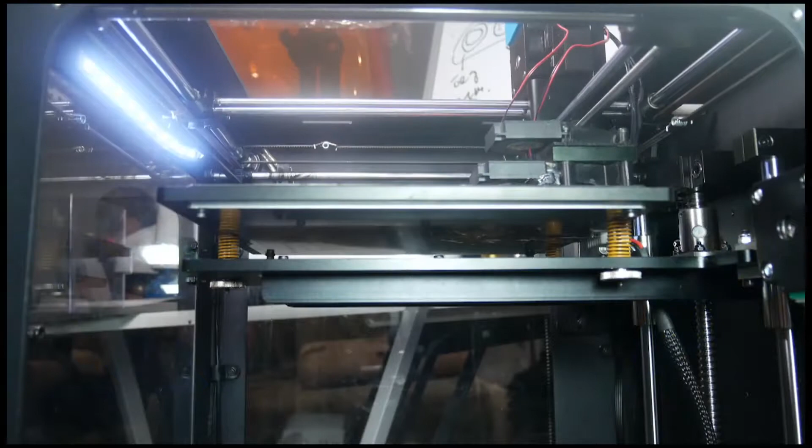So, I think we can go into a variety of different areas. Of course, we've got additive manufacturing, sometimes also commonly called 3D printing. We've got IoT, so Internet of Things for manufacturing is really called IoT for MFG. We've got all sorts of connectivity capabilities and so forth, and latest and greatest technology, for example, in machine tools that may actually be on the machining side, but now we're seeing machine tools that have additive or 3D printing type capabilities on them, so we'll call those hybrids.

But I think really what we're seeing is we're just seeing a lot of advanced technology working its way out into the manufacturing sector. So what's happening is all of these great ideas are all coming together, and now they're being applied in manufacturing.

Simultaneously, and really what's going on is this is happening at an accelerated rate. So you're seeing new technology, and it's getting out there. Instead of taking 10 years or 5 years or even just a few years, people are accelerating those technologies out there into production because, of course, it gives you an advantage over your competition. So you want to get it out there as soon as possible. Yeah, we totally agree. We've seen it on our side.

These two communities of technology, big tech and our manufacturing community, manufacturing technology and distribution, are starting to bridge, but not fast enough. That's one of the things we're doing, trying to get out into the valley and talk MT360, talk about meetups and the different things that each community didn't know about one another.

We're seeing a lot of startup companies really start to accelerate our industry. People would say disrupt the industry, but I think they're accelerating it. AI, machine learning, certainly on many aspects. I'm starting to see a little bit of that in the controls world.

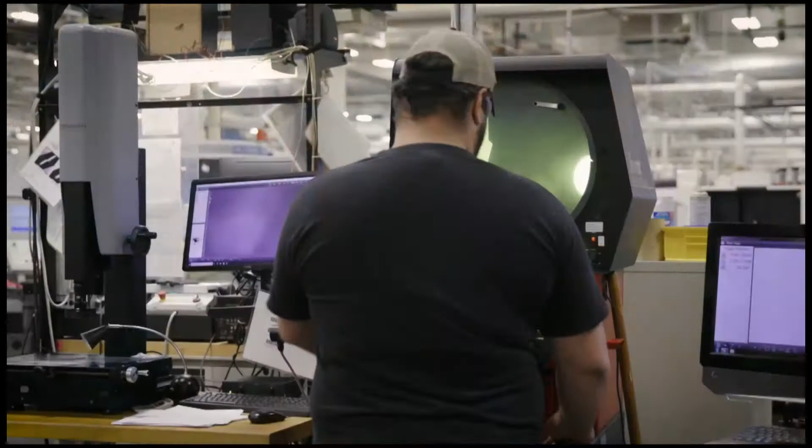But the reality is the control is really where it's at, because if you think about IoT, Internet of Things, the controller is linking into it. This is where all your sensors are coming together. I was a graduate student about 35 years ago, and I would spend months putting sensors on a machine tool, make several runs, collect all the data, and then analyze it. Well today, every time we make a pass on a machine tool, all those sensors are there. We're generating all the data that 35 years ago was a big PhD project - it's now in production. So to me, that next generation controller is gathering the data.

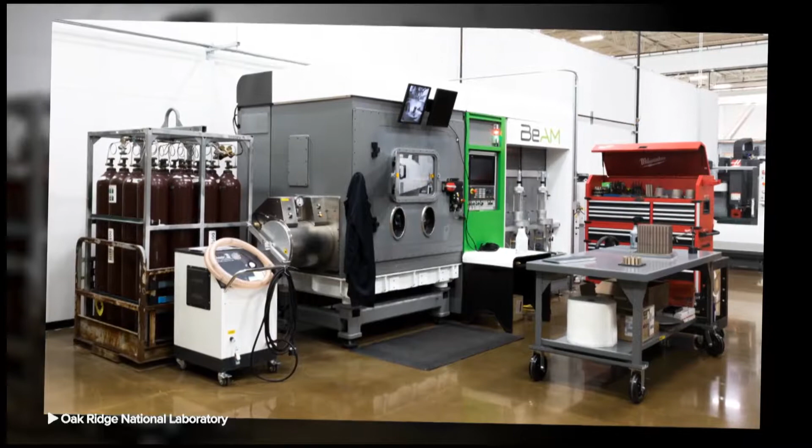That's part of it, and then connecting it to the outside world where we can take a look at models. Is our machine behaving properly? Predictive maintenance - I was just reading some articles today about predictive maintenance. So is the machine doing okay? And if it's not, should we shut it down, or can we have a controlled shutdown maybe over the weekend when we do some repairs, as opposed to just having the machine break, or even scheduled maintenance where maybe you really don't need it, so it's not very cost effective.

So I think it's connecting the information from production, and as an individual part is moving along, I've got information from this part, and when it goes to the next process, that information moves along with it. So when it finally shows up - let's say I'm making a turbine blade, and that blade is going to, say, Delta Airlines or Tech Ops down in Atlanta - when that blade shows up, you know exactly how it was made. And if we're talking about printing that blade, and we're not quite there yet, we're going to know the microstructure, every element of every grain of that blade. So we know that's good. We're going to know where it came from, and that it's a genuine blade that belongs in that engine, so it's placed in a very secure fashion.

So up to now, a lot of this production data has resided on the controller, on the machine. In some cases, you might have a linkage up to a PLC or SCADA system. How do we get that controller, the horsepower and intelligence that a controller to date has provided - do we have to have that on the machine? And if not, how do we get that to the edge, and what might be the benefits?

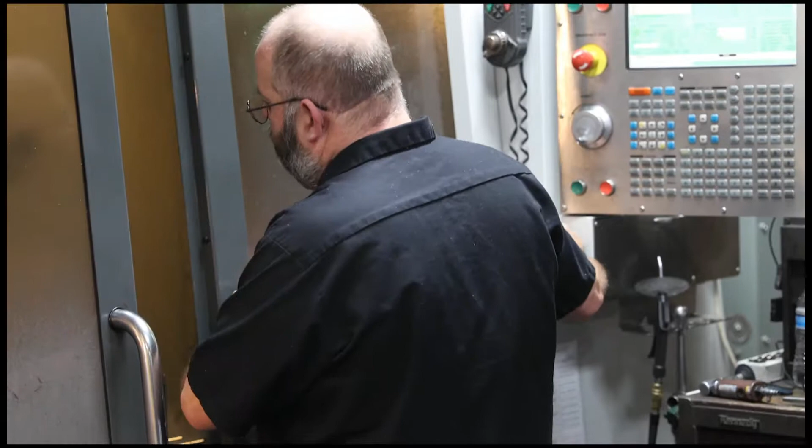Well, I think it's sort of interesting - you used the key word there, edge. People are familiar with cloud systems, this nebulous cloud out there, and the reality is people are using things like Dropbox or Google Drive that they're very familiar with - that's sort of out in the cloud. Edge would be right at the machine. And then we have what I'd call the fog, which is where the cloud touches the ground. Really, the machine tools or any systems coming out today have such powerful controllers on them that you can say, well, we can do the processing locally. You also mentioned artificial intelligence - so we've got AI going on, and I look at AI as almost a commodity.

I can go out and we've got even high school kids now programming for AI, right? So now here's the real question.

The controllers probably have the horsepower to pull this off, right? But if not, well, they can go to the cloud and use processing over in the cloud. So they'll go from edge through fog into cloud, even in terms of data storage. They may send the data up through the fog into the cloud. And really what's going to happen, think about it. And by the way, it happens with computers as well. The computer I bought a few years ago, maybe it's not powerful enough and fast enough, so I get another one. Well, that's one thing when I buy a $500 or $1,000 PC.

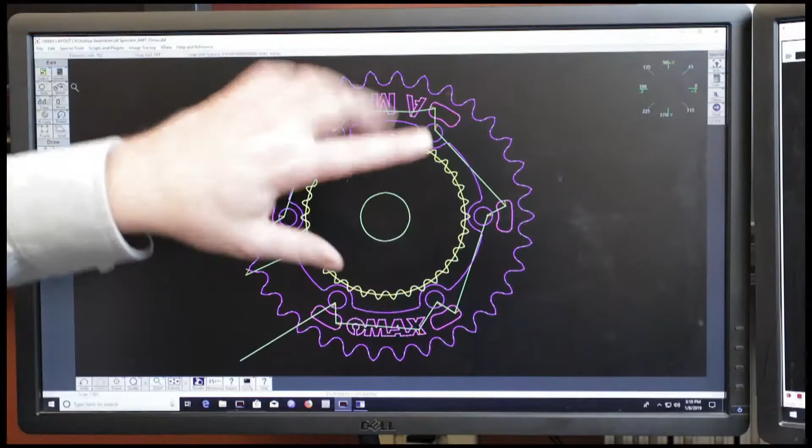But when I've got a $500,000 machine tool, you don't just say, well, I'll get rid of that one and get a new one. What happens now is these controllers are going to be smart enough so that as new algorithms, new capabilities come along, they'll be able to say, oh, I don't have enough power here, I'm just going to go off into the cloud.

It's almost a little retro, but when I was a student, we had terminals. We would go off to mainframe computers, and the terminals were computers, but they weren't particularly smart. Then we went to PCs and did all local processing. And now what we're seeing, whether it's on a machine tool or even your PC, is it's going off to the cloud and making use of data externally, processing here, processing there, out in the cloud.

You really can't tell the difference, right? And that's really what's going to happen with our manufacturing operations and our controllers. They're great locally, but when they need to reach out, they're going to reach out and make use of the rest of the cloud and all the infrastructure that's out there supporting it.

Yeah, understood. And sometimes we get challenged when we lay out that architecture, and people will say, what about collisions? What about, fill in the blank, that has very high impacts to latency. We can't have millisecond delays. We can't have so on and so forth. One of the reasons I've heard is that it takes so long to read G code, which brings that back up onto the discussion point.

Things like trajectory planning, and there are some other ways by which we won't be so constrained to G code. Tell us two things: one, what does it mean to get away from G code, and two, what are the things you see today in technology that let us get away from G code right now? So I think number one is, G code is just a way to go from your design down to controlling the motor, the servos on your machine tool.

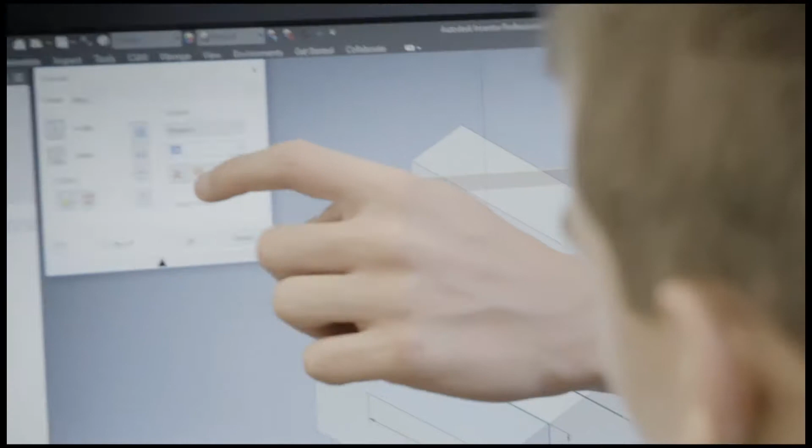Now, that being said, I want to make it really clear: we are not going to drive the machine tool from the cloud in the end. You're going to have your local controller, it's going to drive your machine tool, but you'll have perhaps some trajectory planners at a much higher level, taking a look at, okay, we're going to generate some of the trajectories, or maybe when we have new tool offsets or tool wear, we'll analyze those, execute those, and download those to the machine, let's say in between two parts. So just like you do today, you make a part, maybe you make some measurements, right?

You punch those offsets in the machine, and as opposed to the machine locally crunching and generating a new set of trajectories, it might be generated in the cloud, then sent over to the machine to execute. So you're going to break things up, and depending on what kind of power you need, you'll have more computations happening down at the local level, and up at the higher level, in the cloud and so forth.

We've talked about trajectory planning, which covers our CAM side of the world, with generative design helping us advance our state of design on the CAD aspect, and then looking at in situ inspection and the technologies that make sure what we planned, we actually made, and it was correct. That whole linking of those parts together is the digital thread, and connecting the data with things like MTConnect certainly is an enabler.

Out of CAD, out of CAM, out of the whole computer-aided engineering world, are there certain things that have advanced better than others? And is there a particular lever that we want to pull more than any of those if we wanted digital manufacturing to come to realization faster?

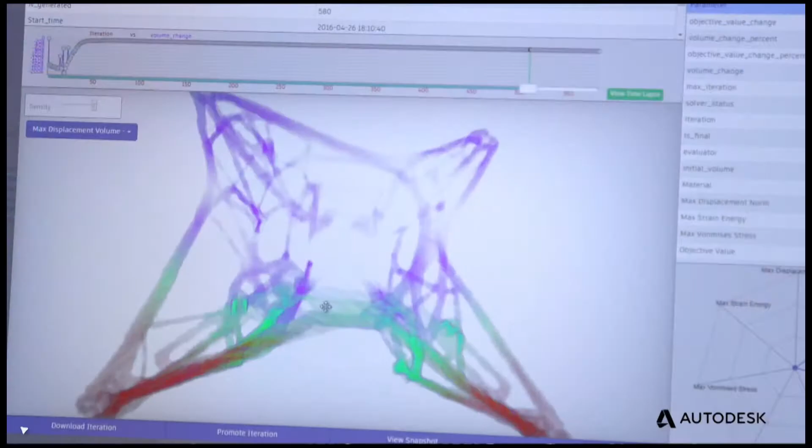Let me talk about generative design. For those of you not spun up on it, you basically say, here is what my loading is on my part, giving a functional description of what I need my part to do. Then the computer modifies the geometry of the part, eliminating elements that aren't supporting any load. And so you get these cool looking, almost natural type of designs. A lot of us have seen these types of things, but there we're only looking at geometry, so that's generative design with geometry.

But when you're looking at additive or hybrid systems, you can start to take a look at generative design with varying material characteristics. Let's take a turbine blade. At the root, there's a lot of stress because it's being pulled while it's spinning up, so you want a tougher material down there, as opposed to a hard material. But you might like a harder material up at the tip, where there could be a lot of wear. So instead of just putting two different materials together, you may functionally grade the material, going from a tougher, more compliant material down here that won't fracture, to a much harder material that can fracture, but only at the tip where you have lower loads. If you just put two different materials together, they have different thermal coefficients of expansion, so when that blade heats up, one expands more than the other and they tend to pop apart. But if it's functionally graded, you don't see that happening. So now we start to bring in not only geometry, but material characteristics and performance specifications.

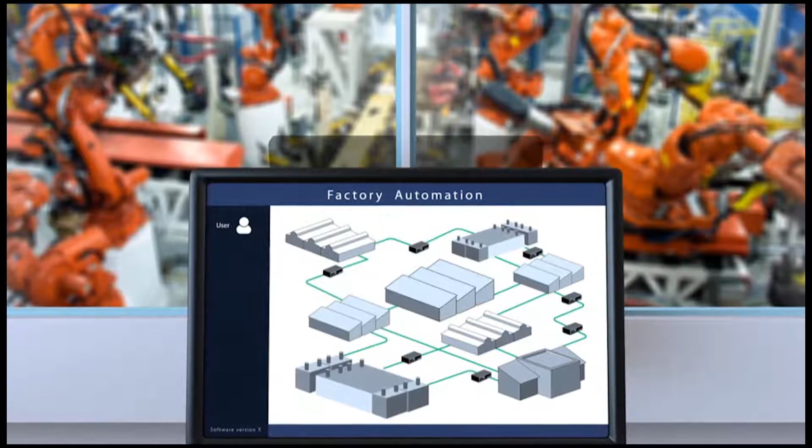Even cooler, think about it: I'm running my 5-axis machining center, and via MTConnect, one of my favorite communication protocols, I'm monitoring the spindle power. You might notice that as you get to the harder material, your spindle power is going up, which is a good thing because that's what you'd expect. So I'm verifying not only that I've printed or added the material that way, but when I'm machining it to final shape, I'm also verifying that I have the right material. Or let's say I've got some holes in a part. As I machine over those holes, your spindle power will drop because you're not machining as much. Again, you can verify that certain things are in the right location with information that flows directly off of something like an MTConnect interface.

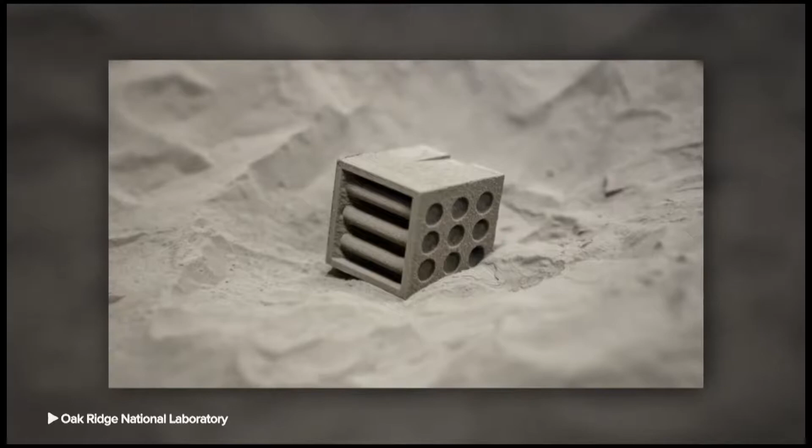I'm starting to see technology companies like Topology and others that really understand the physics and are pouring that into what used to be just GD&T type inspection criteria. I think that's what's going to help us leap forward in realizing additive manufacturing, doing things like bonded composites where there's a lot of questions on the inspection side. How do you know? Are you sure? So I'm really following that space too.

Anything else on the simulation world that you guys are seeing out at the manufacturing demonstration facility?

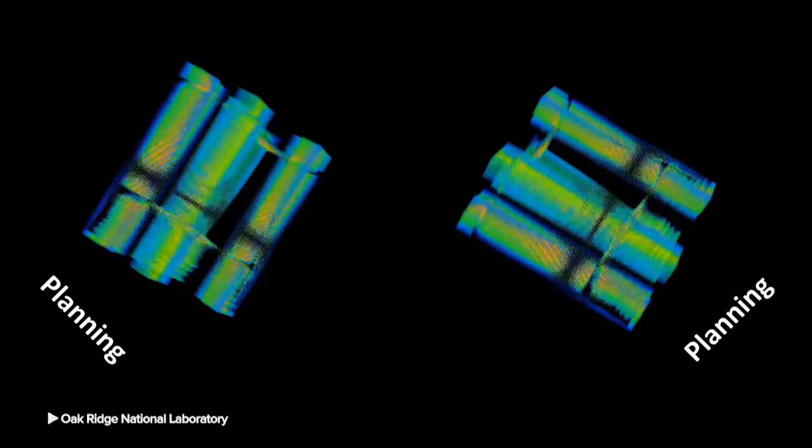Sure, back to the controllers. These controllers are open, so you can start putting in information, machining models, or even tool wear models. We know as the tool gets duller—we saw this in grinding, when the grinding wheels get dull, you see the power levels go up. It's the same thing on machining, so you watch the power levels go up. You can actually monitor your tool wear just by looking at the power levels. And of course you have new systems like tool set stations that will also verify this, so you have a lot of information coming in that allows you to better understand your process.

At some point in time we have to run some experiments. I think everybody in high school did Hooke's law, F equals KX—you hang a weight on a spring and measure how much it deflects, so you can compute that spring constant. You could look up in a handbook the coil major diameter and wire diameter and calculate it that way, but I still need material properties. So at some point you've got to run those experiments.

Every time we run that machine tool, with all these sensors, I'm running these experiments. But now the controller can have some of the greatest models—and by the way, I think this is very cool—you might buy some professor's model for a dollar and stick it in there, and that's going to help improve my productivity. You bring it all together, and it's also going to tell me exactly what's going on with my part. The data you're taking are going to help refine the models, so it's this continuous cycle of improvement, and we're going to have some amazing things coming down the road.

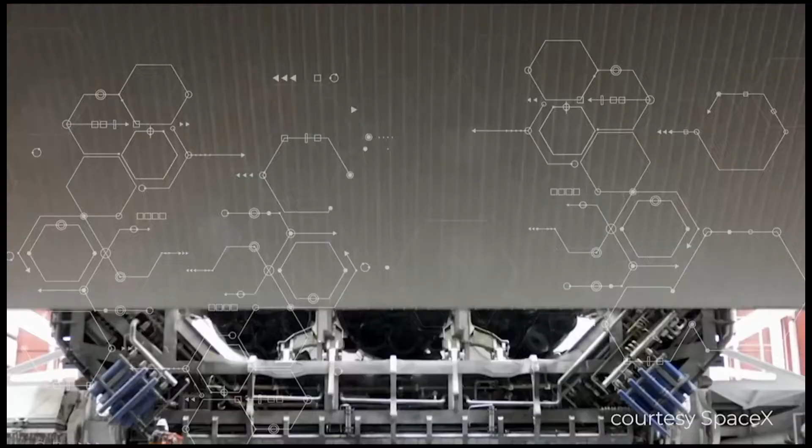There are times when we manufacture to achieve a grand vision. SpaceX wants to take us to Mars within 3 years. How do you design and manufacture to make that happen? To make anything happen that's novel, untried, new, and visionary.

Let's go do what we know we can do. There are less boundaries out there than we think they are. The one big thing in the future of manufacturing is going to be the evolution of machines and intelligence in machines that now start telling us what products to make, closing that gap from ideas to reality, from bits to atoms.

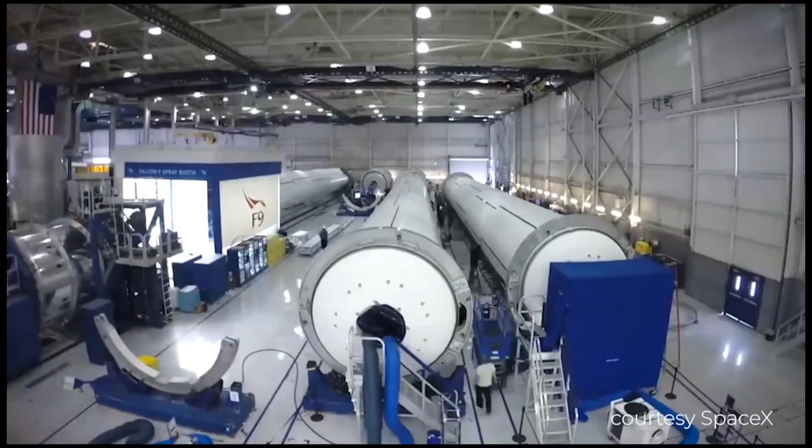I'm a great fan of Alan Kay's wonderful phrase: if you want to know what the future is, invent the future. SpaceX, one thing they do really, really well is they basically don't take no for an answer. If there's something not on the shelf or quickly developed that they could use, they develop it themselves in-house.

As market forces shift, manufacturing assumes new roles. You have to innovate, right, to be able to truly capture a market. Xometry connects customers needing manufacturing with the best shops and suppliers to do the job.

In order to keep the whole demand side of the global economy going, we have to shrink the time to market, the time of exposure to customer, right? And that's the supplier's responsibility and the purchaser's responsibility.

Our software reads, predicts, perceives, if you will, what inefficiencies in production are occurring. The whole point is to take the guesswork out, and it modulates across the supply chain for greatest success.

The weakest link is between design and fabrication. Ideas are plentiful, but taking a design and making it is what's hard.

Manufacturing can't exist by itself. It needs to be supported by design tools, by software systems that operate in an ecosystem around it. These often operate in silos and independently of each other because there's very little communication. A lot of that can be alleviated if we can bring that information into a design tool, then those design tools can be more informed.

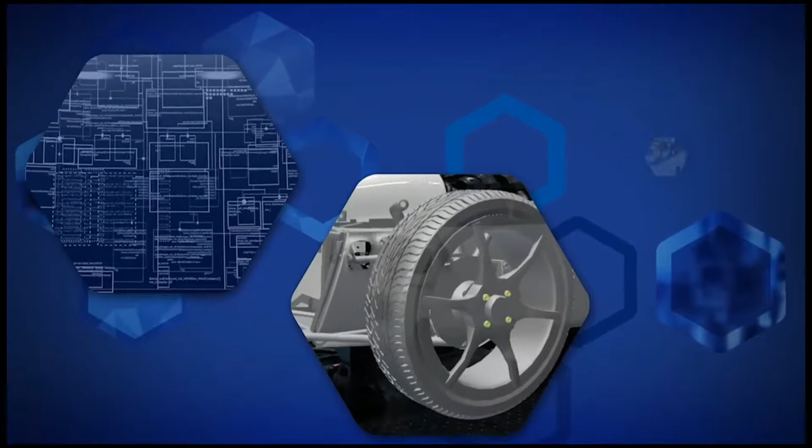Computing power goes far beyond design tools. The broadest and the transformational change that's happening in manufacturing today is it's increasingly digital, democratized, and distributed. We're able to put sensors throughout the factory floor to capture data in real time and integrate that with sophisticated modeling and simulation tools with the capability to deal with uncertainty. You can track every part and every process, and you can capture the errors before they propagate.

Which comes close to the full available power of artificial intelligence. When people are trying to understand the likelihood of anything going on in a shop floor environment, that's where AI is going to come into play. Whatever you're trying to understand in your shop floor environment, there's going to be data collected. AI can be used in any subset of your operation, whether it's collecting data, reporting on it, or doing a predictive model around it. Having a data engineer and data scientist is going to be an integral part of your business in the future.

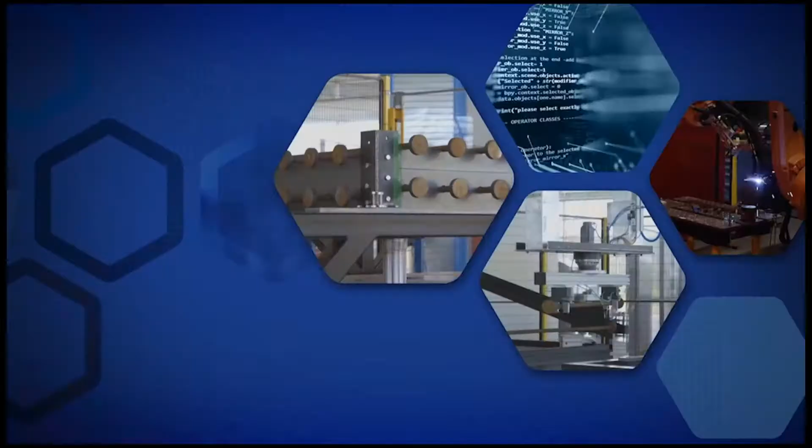Can AI-powered machine tools change themselves on the fly to perform new tasks? The idea is to get to the point where the system reconfigures itself dynamically based on the work that's coming in. Even up to the minute, the system will reconfigure and realign itself to meet those outcomes.

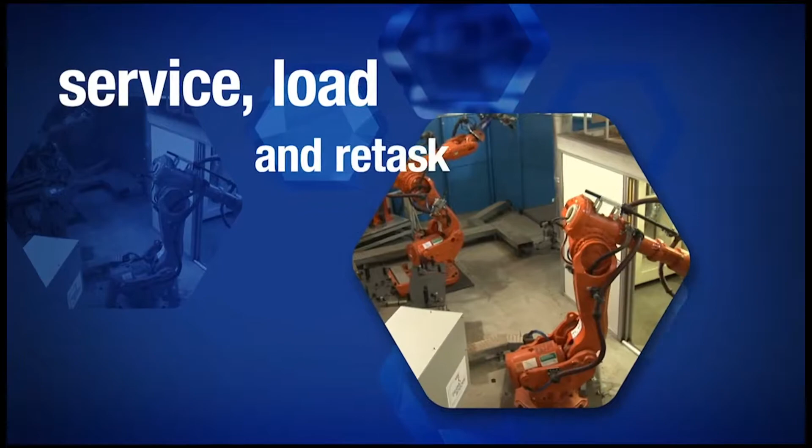If the part is large enough that it requires two robots, they can actually self-organize and replan themselves to service that machine and load it, and then go retask themselves.

The idea of the robot being part of a team may not inherently be new, but how it actually responds dynamically as a true partner or team member is new.

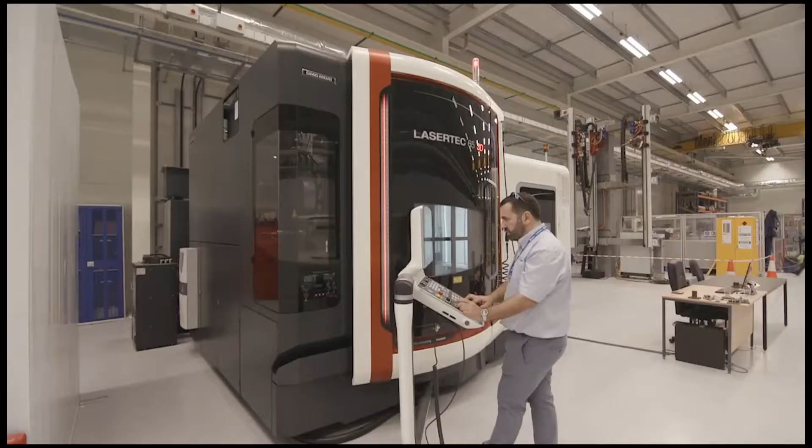Machines working together, aware of each other, aware of themselves. The way we want to make this equipment work together is to allow them to become what we call self-aware, or more intelligent, so that the devices themselves will start to collaborate together in the manufacturing processes dynamically.

What that means is the machines have capabilities that they are aware of. They know how to announce these capabilities to external agents if and when required, and they know how to connect and augment the capabilities of existing systems if they need to.

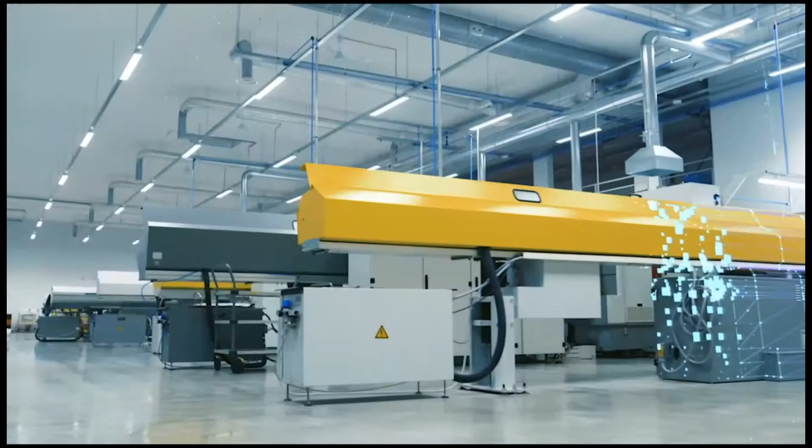In the near future, I think computers are going to be fed with so much information that they know how to build fairly accurate models of the real world.

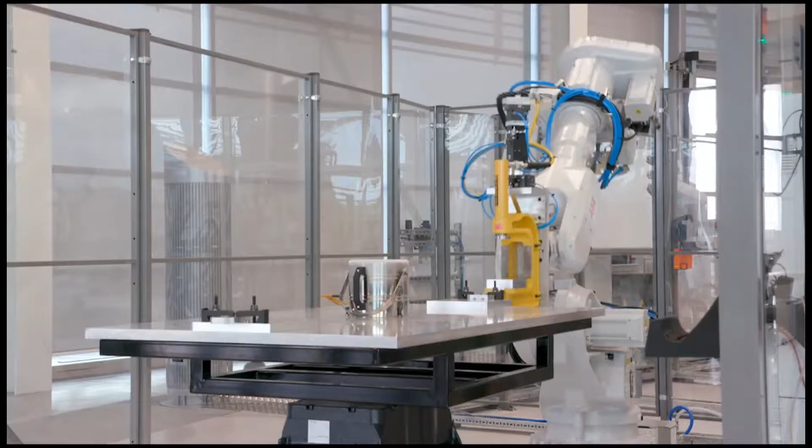The real world of manufacturing includes an ever-expanding array of new materials, some with highly exotic properties, from macro to nanoscale. There are a lot of advances happening in materials - metamaterials, high entropy alloys, all kinds of new advances being made, which are still at the laboratory stage.

Engineered to have properties not found in nature - to bend light, block frequencies, change acoustics, even make things invisible.

At Xerox's Palo Alto Research Center, scientists and technologists work side by side with sociologists, ethnologists, and anthropologists. The human factor is crucial, but will advances in automation make the role of humans unnecessary?

I don't think the role of humans is going to diminish by any means. In fact, I think they are the ones who are going to build or augment artificial intelligence, and build something like collaborative intelligence.

One of the things we're learning in our Industrial Internet Consortium testbeds is what the human component is, because we know it's changing, but we don't know what it looks like 10 or 20 years from now. The reality is people don't go away.

A few of them have had enormous impact as entrepreneurial pioneers. When you look at people like Jeff Bezos with Amazon or Richard Branson with Virgin, they see a challenge and they can highly focus on that challenge.

Manufacturing needs that big leadership to come from outside of our space potentially. Those entrepreneurial mindsets, I think, bridge a lot of the gaps we don't see coming down the manufacturing pipeline, as it raises interest from manufacturing companies today and leaders across the globe.

Quite honestly, that says, well, we can do that too. In fact, we know better how to do what they just did.

We can best know the future by creating it through the lofty ambition of inspired leaders and through all our resources now converging in novel ways.

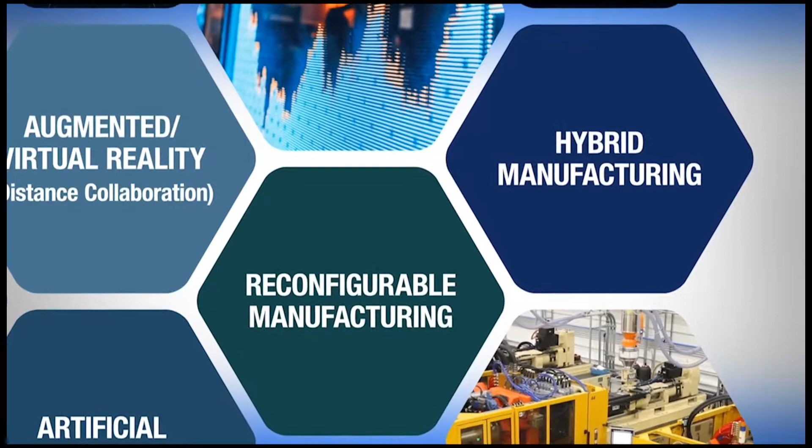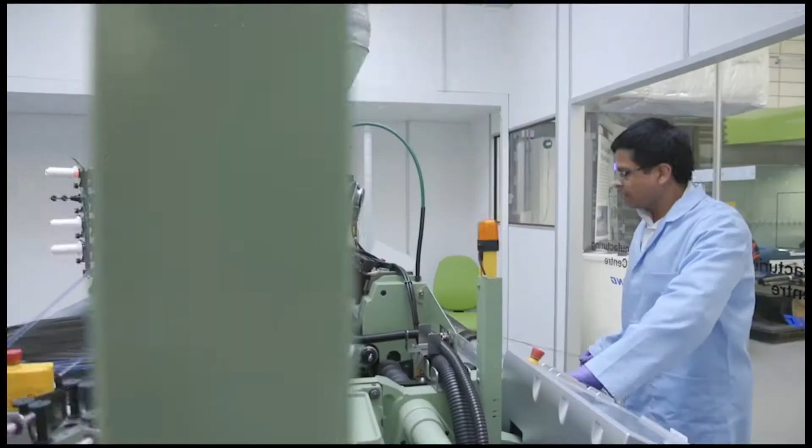Generative design, inspired by nature. Augmented and virtual reality, enabling distance collaboration. Artificial intelligence. Reconfigurable manufacturing for optimum agility. Hybrid technology, additive and subtractive in a single machine. Metamaterials and high-entropy alloys. All materials and processes digitized, a digital thread throughout a product's life cycle. It's all in a future we can make, a future we will make.

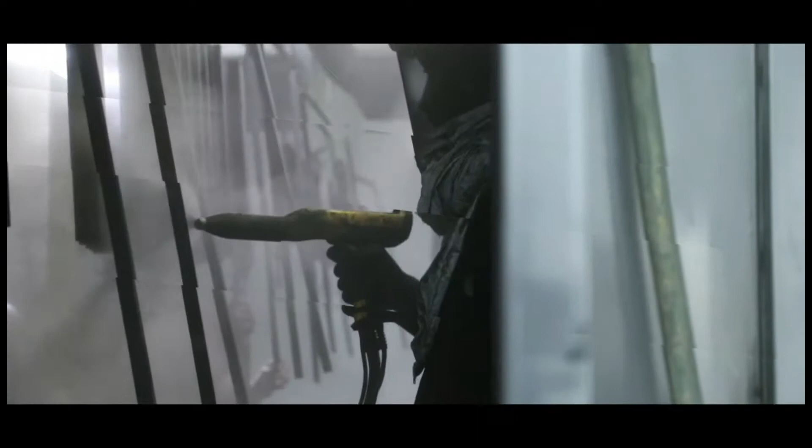What's up, guys? We're here with Ryan Wasman, the Sales and Marketing Director at Concept Systems. Ryan, what is it that you guys do here, and what are we going to see? We're an industrial automation company, so you're going to see how we build panels, we build robotic cells. You're going to see lots of cool things that we build for manufacturing. Cool. Let's go take a look.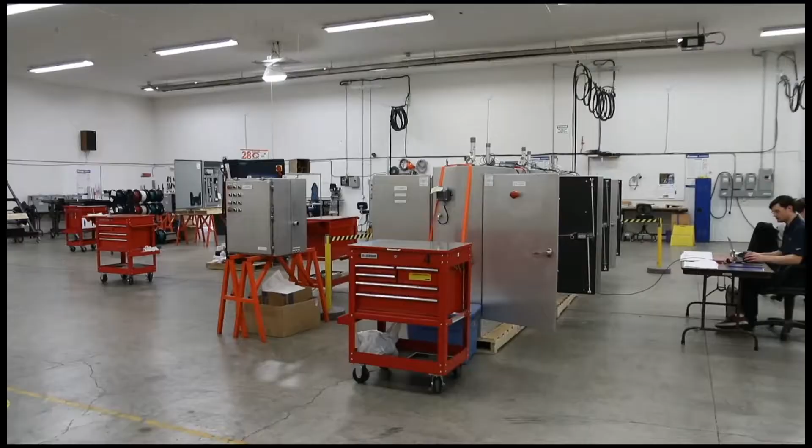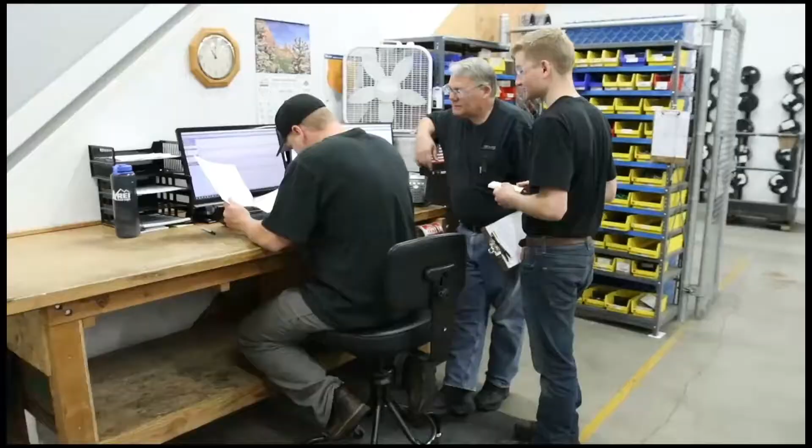So this is our shipping and receiving department. This is where everything starts. You guys get all your material in here, everything from the nuts and bolts up to the robots come through here. Yeah, so as we design something, we put a bill of materials together, that gets sent over to purchasing. They go through and start buying everything for that specific project. It comes into this location and gets kitted for that project, and once that kit's built out, it moves onto the manufacturing floor.

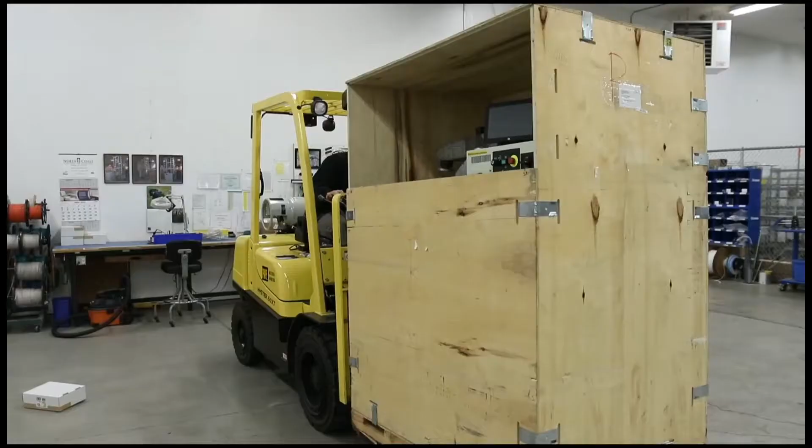So even the big robots, do they come in and stay here, or do you have to move those into a different location? They'll come in here, and once all the pieces for that project are here, we'll move it out to a second building where we do a lot of our mechanical builds. We can see that in a little while.

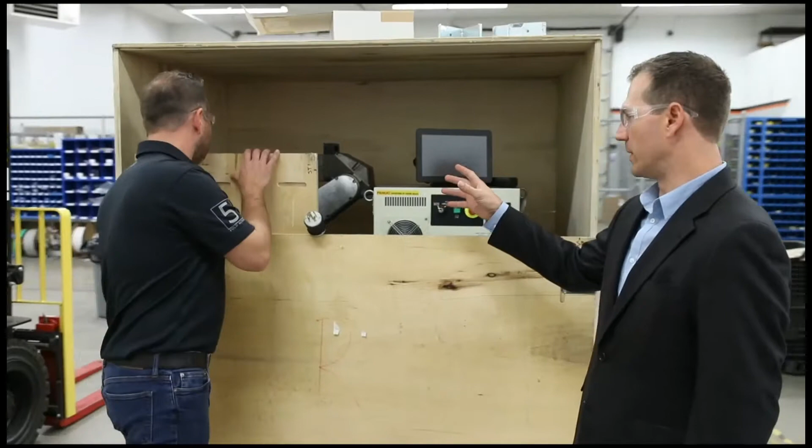So do you guys have any robots in the crate still that haven't been put together that we can see? Yeah, actually we have a robot over here that's being set up to get shipped out. This is a paint robot that we've built a paint platform around. So this is a paint system, and the claim to fame with this one is it has a really simple, easy to use interface, so we can push programs out via the internet. We don't even have to be on site to program this robot.

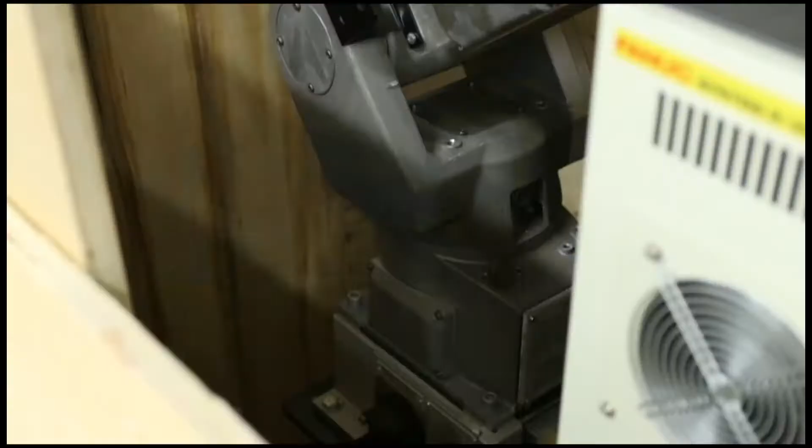So it's helpful for general industry customers that don't know robotics programming. From a robot standpoint, there are different axes, different ways to control it. How many axes are on this robot? This is a 6-axis. The term is 6-axis articulated arm. So what does that mean? It has the ability to move in 6 degrees of freedom - a point in space can move in X, Y, Z, and then rotate around X, Y, and Z.

I know you guys don't manufacture the robots, but with the panels, do you guys do anything with those - anything custom, or make those yourselves? Yeah, actually, in the back I've got a good example of panels that we build. This one has a panel that we've used to integrate the robot controller, the touch panel, and some of the electronics that go into getting the data from the cloud.

So with the panels, are you guys doing them all from scratch based on the application, or do you have a set standard way of doing things? Well, we have a set standard way of doing things as far as the methodology goes - we build our panels according to a best practice. But for certain things, we'll have completely custom designed panels. Some customers call us up and say we need this panel design, or this panel built, and we'll build that panel from their print. We have an entire design group that can design these panels as well.

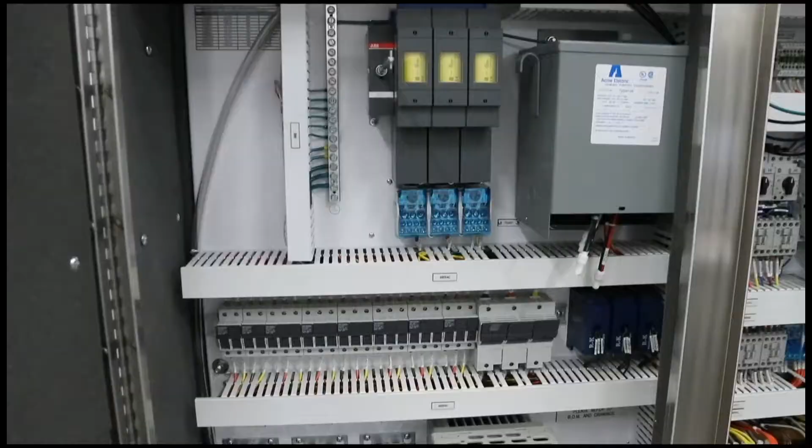Very cool, all right, let's check out these panels. Explain to me what's going on here. So you can see these panels are actually being installed in an environment that needs purged air - there's no paint on these panels because they're going into an explosion environment. You can see we've laid out everything in this panel - we've got drives, transformers, all the wiring relays for this. This panel is a great example of a custom designed panel we've built to a specification.

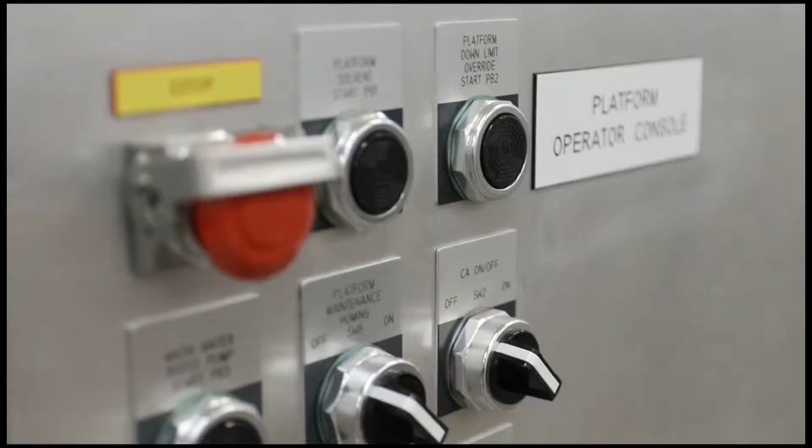So these are parts that came in through receiving that you guys don't make, but you started with basically a blank box, built this out, organized all this stuff and assembled it? Yeah, so based on the customer's requirements, they'll tell us hey, we need to control this thing, it's going in this type of environment, and from that we'll design it into this type of enclosure - there's different NEMA type enclosures, NEMA 4, NEMA 12. So we'll pick that style of enclosure based on the environment it's going into, and make sure the electronics going into it control it to their specification.

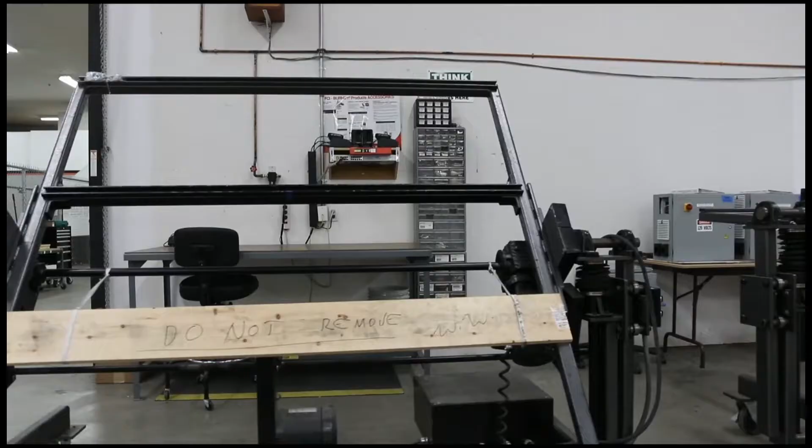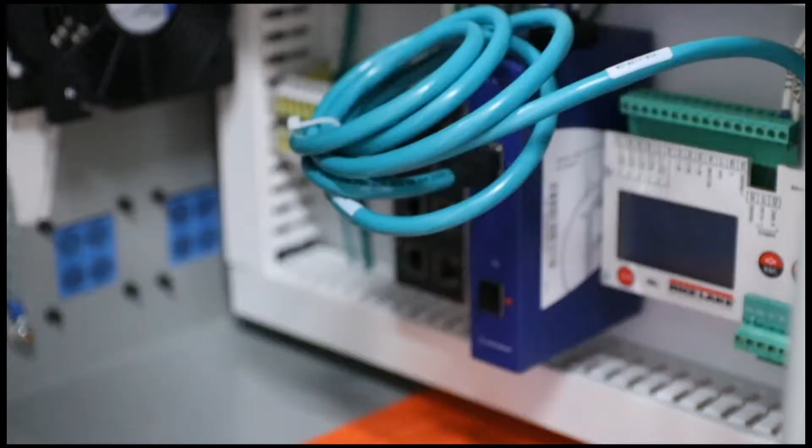And this is all from scratch - we start with this backplane and it's blank. We have a design group that will lay out the entire backplane, make sure there's spacing for the components, and make sure we take into account heat loads and ambient temperatures, so that we're not putting this into a 90-degree environment and it overheats, right? Yeah, that wouldn't be very good.

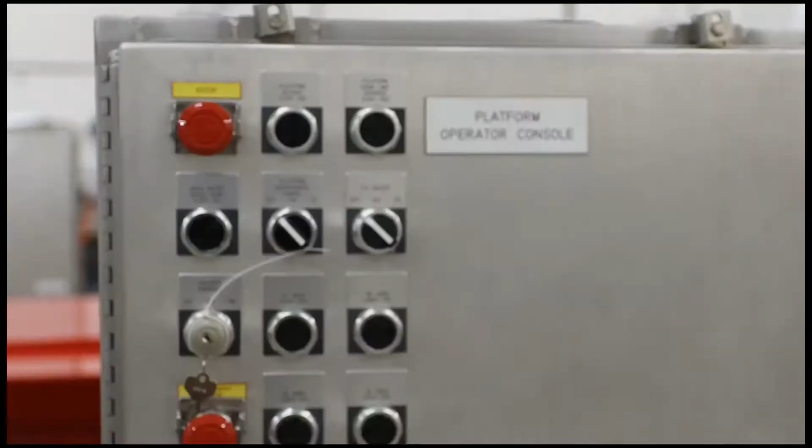So what's the range of environments these could be in? We've done systems for washdown environments—food and beverage typically has to be washdown capable, where it will get wet, hit with a hose and cleaners. It's not meant to be directly water poured onto it, but it can survive in a washdown type environment or a clean room type environment. We've also done panels for hazardous environments, explosion environments, and then just your regular panel.

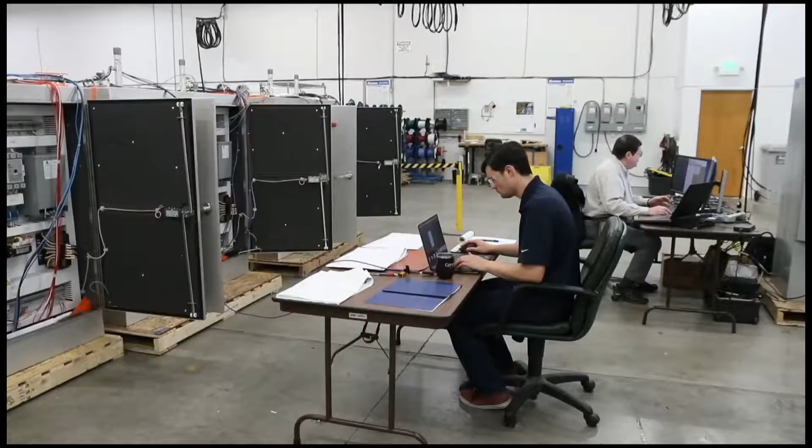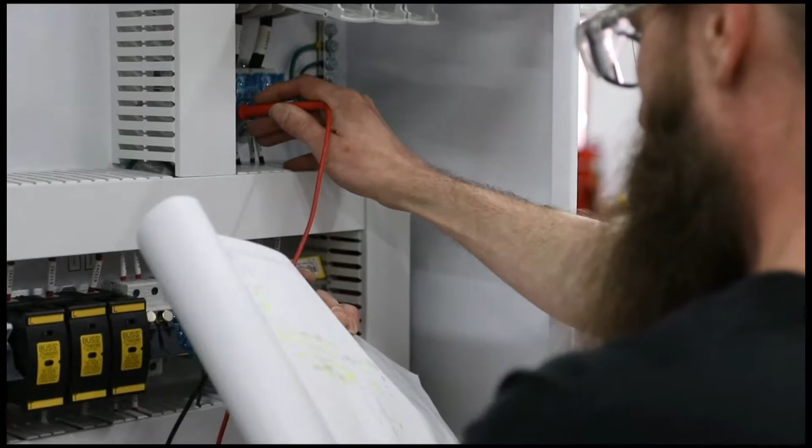It looks like these are ready to go, because I see others that are half built and being processed. Are these ready to ship? So these are built, but not tested yet. They're open like this for panel checkout, where we go through a whole QC process—make sure every wire is tight, everything is in place. Then engineers come out and plug into the panel, make sure it's working and that it'll land at the customer's site ready to be plugged in. So it's the final test before it gets packed up and shipped out? Yes, exactly.

So then we've seen the panels, we saw a raw robot come in. Now putting those two together, what do you guys have to show where you can see both aspects interacting? If we walk over to Bay 3 of this building, or Building 2, a separate building where we do a lot of the system builds, you can see these panels attached to robotic cells and some other things.

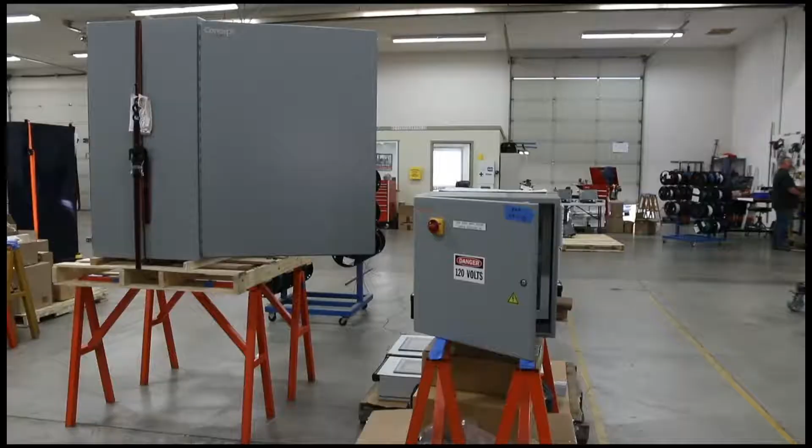So what types of applications do you guys work with the robots? We work in a lot of aerospace applications around paint, and a lot of smaller general industry paint applications. We've done a lot of assembly applications with robotics, and a lot of machine vision guided robotics for cutting and deburring solutions. We also have some collaborative robots where somebody works side by side with the robot next to them without safety in place.

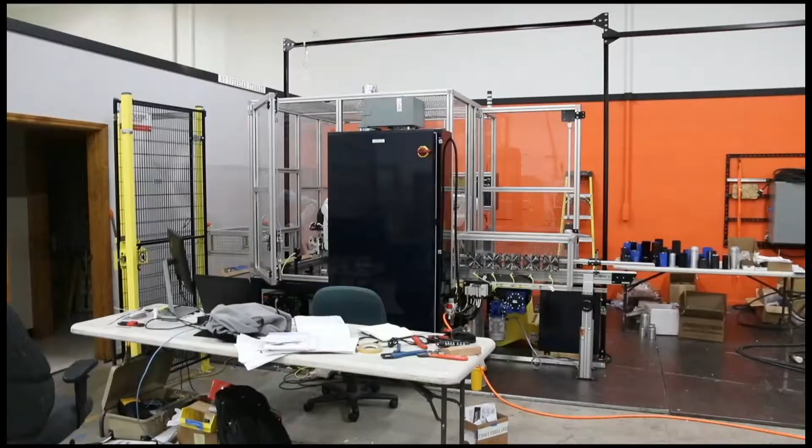All right Ryan, what do we have going on over here? I see a couple robots and some controls. Yeah, this is an assembly cell—multiple robots in a small area with an 8-second cycle time, assembling electronic components. This is actually a piece of an assembly line; the other pieces are being built in a different facility in the Charlotte office. This will connect up with 2 or 3 other pieces to make an entire start-to-finish assembly line for electronics components.

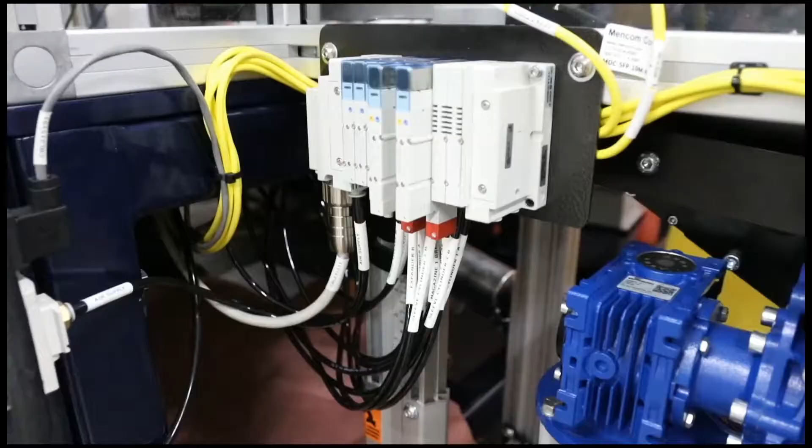I see these are some smaller robots. From my experience in the industry, I've seen ones that are bigger—do you guys deal with ones that are like our height or above? Yeah, so we've installed small robots this size and even smaller, up to a 2,400 kilogram payload robot that needs a 20-foot ceiling just to operate.

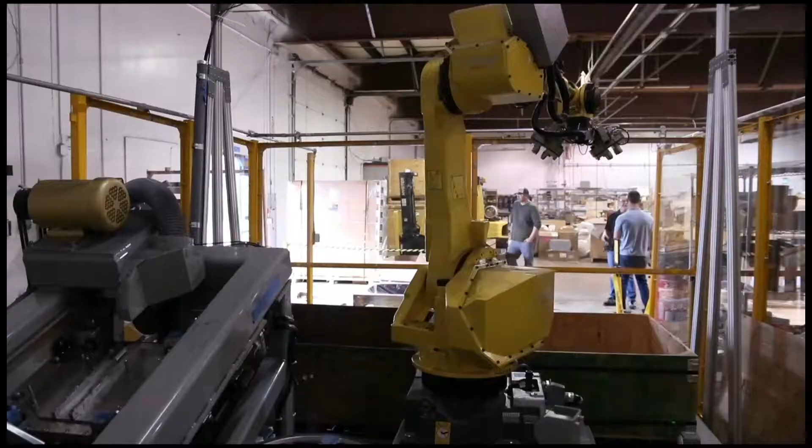Wow. So what do you guys have here that we can see from a size standpoint? We have a mid-sized robot cell across the street if we wanted to go take a look at that. Yeah, let's go look at that. All right, so that's what I'm talking about—bigger robots, Ryan. What is that?

So that is a FANUC, I believe it's an M710. It's a bin picking system for a customer that wants to put an entire bin of parts in front of the robot, have us find the top pieces that we can pick, then we're picking them and doing something with them, and then returning them as the bin comes out.

So it looks like I see you've got 2 sample bins here to mock it up—they're going to put a bin of parts in that are all jumbled around. Yep, no particular order. The robot's got to figure out the location of the parts. Are they going to stack them in the other bin neatly? It's going to stack them in the bin neatly after that, correct.

So what type of industry is that working for? So this is actually for a customer—let's see if I can describe this properly—they're making metal components for oil and gas.

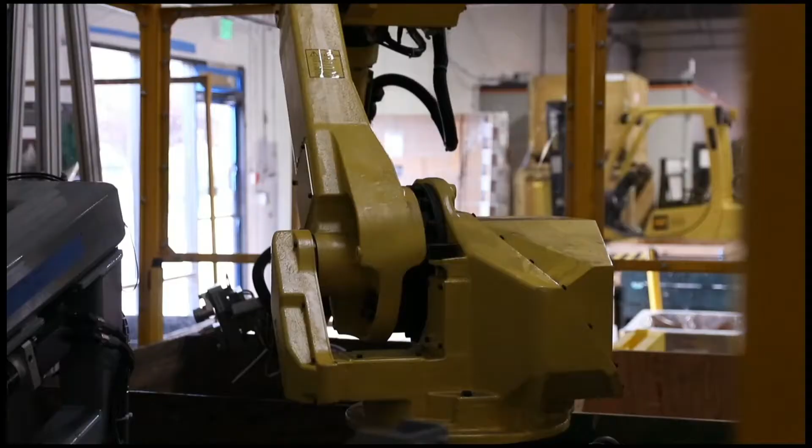Okay, so they're making these pieces, and then they need to do something with them after they make them. There's a secondary process they need to go through, and that's what this cell's doing. This cell's taking the made piece, finding it in the bin, taking it to the secondary process, processing it, and then stacking it nicely in the outfeed bin. So what's with the black box and the lens on top?

That's actually the bin picking solution that FANUC offers. There's a projector in the middle, the big box is actually a projector, and there's a camera imaging it at an angle. So we project a pattern onto the parts in the bin, and then the camera images it and finds, based on how that shape distorts when projected, the top pieces. That's the solution that's helping us actually pick the bin.

So that's looking at the parts and doing that part, and then the robot's taking that information and determining where it needs to go from there. Yeah, exactly. These guys are actually working on it over here.

And how fast would this, once this solution is done, how many parts is it turning through? Is it going slow, or relatively speedy? It's probably a part every few minutes. I don't know the exact cycle time of this, but it's able to bin pick relatively quickly, within a few seconds. And then that part has to go to the secondary process, which takes a minute or so, and then it's going to put that part in the bin.

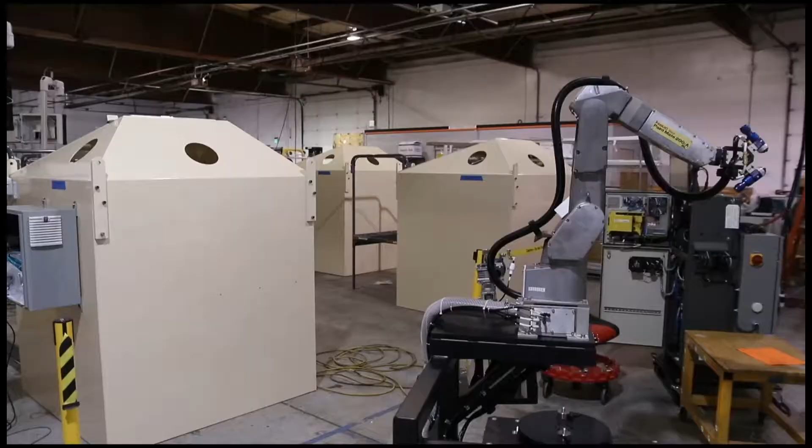Ryan, what's with the giant doghouse looking parts over here? Let's go take a look, I'll show you what they do. You can fit inside of them. They're essentially automated scrap weighing systems.

So we have a customer that wants to maintain traceability for their scrap, because they actually get money for their scrap when they ship it. They want to be able to track it. So these are installed where a customer's employee can badge in, dump their scrap, and it records by employee who's putting what scrap into the bin.

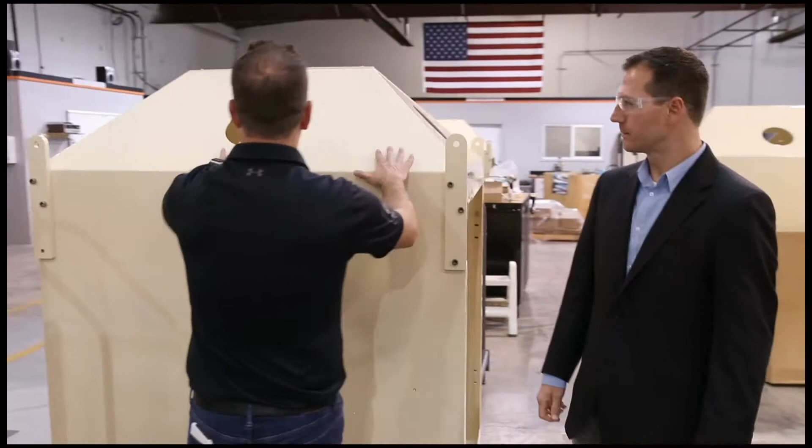So are these turned up? Is this the bottom of it, and it gets flipped up and it goes in? No, this is the top. They'll actually dump through the bigger slot. Through the port? Yeah, right here.

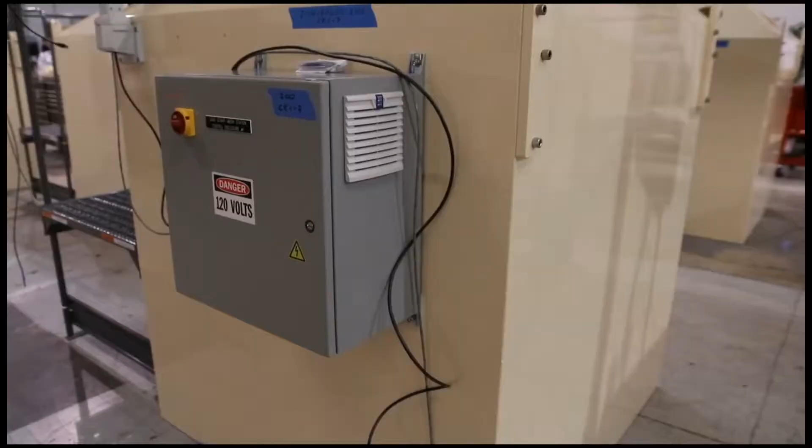Weighing scrap has got to be extremely important to those companies, right? Because they're trying to recoup the cost of the material. So you guys got to be very accurate with this, how does that work? Yeah, they want to be accurate to within a few tenths of a pound. But really, when they're shipping their entire scrap out, they're talking thousands of pounds of scrap. Every pound or two can matter, and if they're not capturing that, and it gets to the scrap people, they say well, you sent us 2,000 pounds, and they say no, we sent you 2,500 pounds. Now there's this big discrepancy. So this eliminates that discrepancy for them.

All right guys, so Ryan has to go, he's literally going to Africa tomorrow. Ryan, I appreciate you walking us through this. Yeah man, we're going to stick around and show you guys some more stuff. But what's with the trip to Africa tomorrow? Actually going on a mission trip, going to meet kids that we sponsor in Rwanda. Very cool, yeah, very cool. Well hey, be safe, safe travels man. I appreciate you showing us everything. Looking forward to it. We're going to go jump into some things while he's gone and poke around and show some more cool stuff.

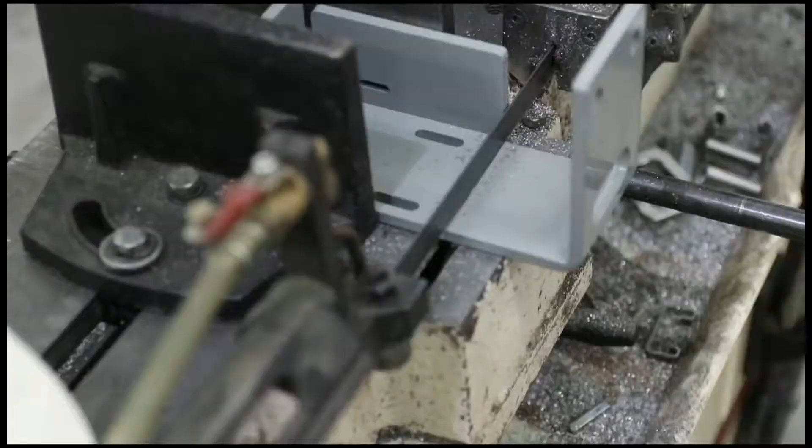Well, my name is Michael Gurney. I'm President and CEO of Concept Systems. I've been with the company since the beginning, 20 years. I was always a tinkerer growing up, so I was the kid that was taking things apart and putting it back together, and hopefully it worked.

So my name is Ryan Wasmond, Sales and Marketing Director at Concept Systems. I've been here for about 2.5 years. I actually got started in manufacturing when I was in my late teens, early 20s. I worked at a design company doing computer science work, as IT administrator for a design company in Michigan. The owner of that design company told me I should go visit one of his friends who had a robot they were trying to program, and his exact words were, 'Do you like playing video games?'

And I said, "Yeah, I love playing video games." And he said, "This is like playing video games, but in real life."

My name is Michael Jeffers. I'm a panel shop technician. Been here for about 9 months now. I got started in manufacturing pretty much when a buddy of mine noticed that I had an interest in technology.

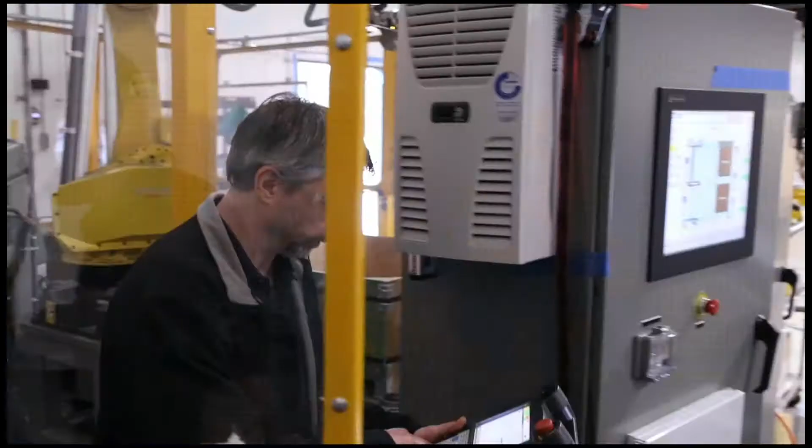My name is Jerry Flynn. My title is Principal Engineer, and I have been with Concept Systems for 6 years. What I like about the manufacturing industry are the many different challenges and opportunities to see different things, how they work and how they're made. It gives me a new appreciation when I go places and see things and know, hey, I know how that was done, or that came off one of my machines. It's just a good feeling.

My name is Evan Gonerman. I am a controls engineer here at Concept Systems, and I've been here a year. I was really into math. My dad was a math teacher for 30 years, so I really liked math, and that brought me to mechanical engineering. Then in college I started working with robotics and automation in general, and that's when I started to see, this is where the fun's at, this is where the good times are.

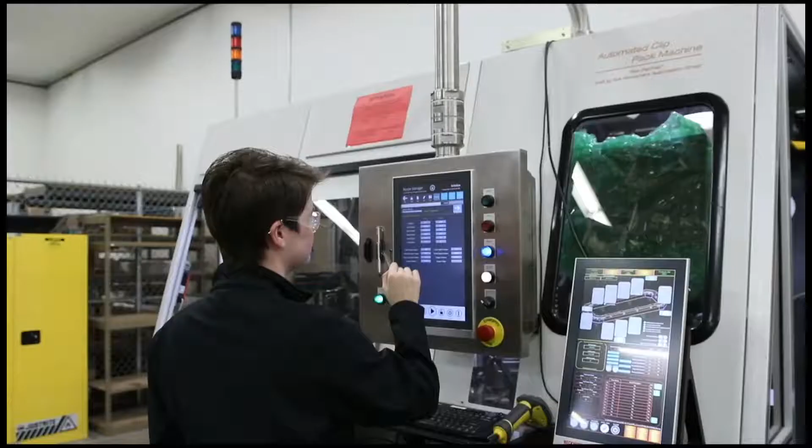My name's Mariah Biederman. I am a software engineer here, and I've been here for 2 years. For robotics, I really like what they enable us to do that we wouldn't otherwise be able to do. I think robots are fascinating because in trying to improve and perfect them, we're essentially looking at how to reproduce and recreate ourselves, things like sensing and manipulating things, using your arms, maneuvering around things and getting things done. We're trying to have this introspective definition, looking at how we do things and recreating that with an engineering device, producing it in a way that makes our entire society more effective and moves it forward.

The reason I've stuck with it is just the constant problem solving. I love puzzles, I love challenges and overcoming those challenges, and it's been really rewarding to have somebody tell you it can't be done, and then you do it, and it's done. It's fun for me to look and say, we did it, what else can we do?

You don't get worn out here because you're always doing new things, always seeing different manufacturing processes rather than the same thing over and over. What does it for me is just the ability to create something with my hands and see it as a finished product, and see something that I built be utilized.

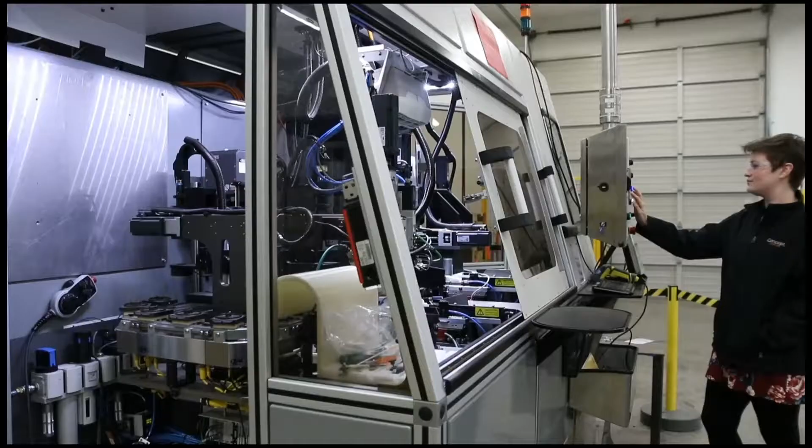It's like being able to control a toy. Sometimes I'm working with these machines and I feel like a little kid, because I'm like, oh look, the thing moved, I pressed the button and it worked. It's super exciting because it's this tiny little thing, but you can make a lot happen.

You can, just with these tiny little bits of control, actuate stuff that just kind of blows your mind. It makes me feel like a kid.

If you like to build things, why not get paid for it? When you look at manufacturing in the U.S., there's automotive, aerospace, food processing, metals and mining. The variety is tremendous, and applying technology at the pace it's advancing, the growth potential is exponential when you combine those two. There's a lot of opportunity for you to get on the floor and build a machine, to program a machine, to help make things that make the world go. This really gives an opportunity for continuous growth, and it's really just up to you how far you want to go.

I had a 2-year degree in computer science, and I got the opportunity to start programming robots. That led me down a path of being a problem solver, being on the manufacturing floor. I'm in an executive role now, helping manage this company. I don't have an MBA. I have the technical skills required to help solve these problems. So you could literally start from a 2-year degree and, just by working towards doing a great job solving problems, move into a position where you're now affecting 100 people helping solve problems.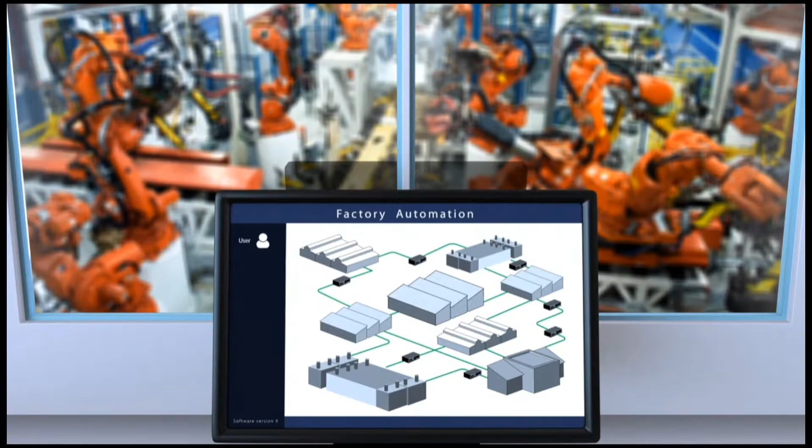Hi Jules. Hi Russ. What do you do in relation to digital manufacturing? Well, I'm a standards developer, which means I put together standards. The one I work on is the MTConnect standard, which happens to be a digital manufacturing standard. Essentially, MTConnect is a language for all types of different computers and machines to talk to each other. Because it's a machine-to-machine communication standard, that puts it pretty squarely in the digital manufacturing space.

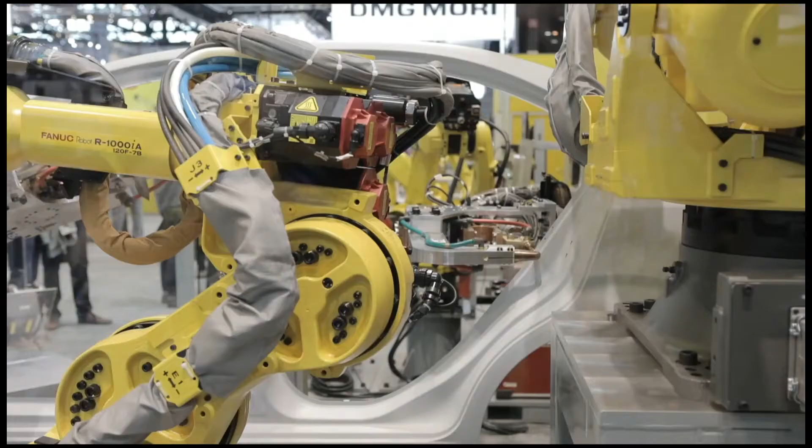Okay, so talk to us a little bit about the technology landscape that you referenced. So the technology landscape for MTConnect and for digital manufacturing more generally is straightforward. Think about the number of computers already running production in plants all over the world, and the software that's on those computers. Think about the networks those computers are on. It's not that modern — there's a lot of outdated software, and a lot of outdated or outmoded networking. A lot of the networks themselves or software are actually just old.

Some of that's going to be replaced with new technology. Some of it is going to go away and be retired. Some of it is going to be supplanted or supplemented with new or additional technology. So right now it's kind of an interesting time, and it's been like this for the last, say, 3 to 5 years, where we're really seeing an increasing pace of change in manufacturing that just comes down to how do you get better networking software in the production process.

Okay, so bring MTConnect into that for us. What is MTConnect at its most base form? Sure. So MTConnect, like all other data standards in manufacturing, and there's a lot of those, is essentially a piece of the puzzle of interconnectivity, interoperability, and just kind of the plumbing behind how everything works. So if you think about applications in digital manufacturing that are trying to solve some manufacturing problem, maybe that's predicting when a tool will fail.

Maybe that's predicting when a spindle will go out of round and need replacement or repair. Those types of problems where you're taking information or data in, crunching some numbers, applying some algorithms, maybe doing some machine learning, big data. These are now kind of into buzzword territory, but that stuff all needs underlying infrastructure where the data is collected, scrubbed, normalized, and transported from place to place. There's a security layer that needs to go in there. MTConnect is one little sliver of that, where we're normalizing definitions for all that data coming out of the factory.

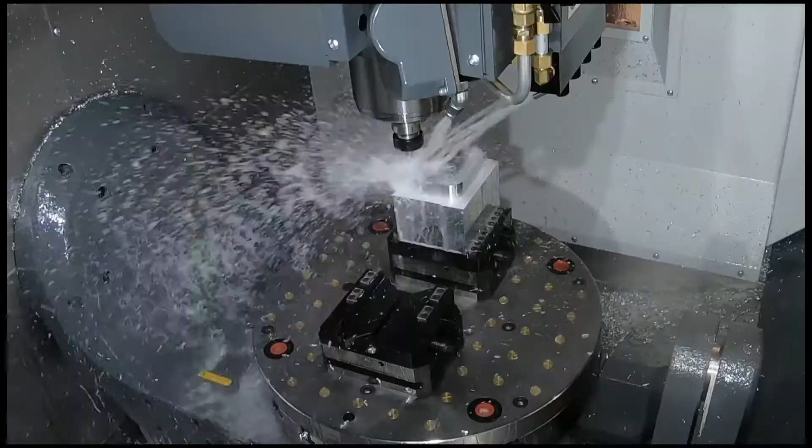So who uses MTConnect? Sure, so we're focused primarily on discrete manufacturing, which means anyone using a CNC machine or anything making discrete metal parts. Cutting and forming type processes tend to be where MTConnect is focused, not so much on process manufacturing. The three categories of users we see are end user manufacturers, so that's your big automotive, aerospace OEMs and their supply chains.

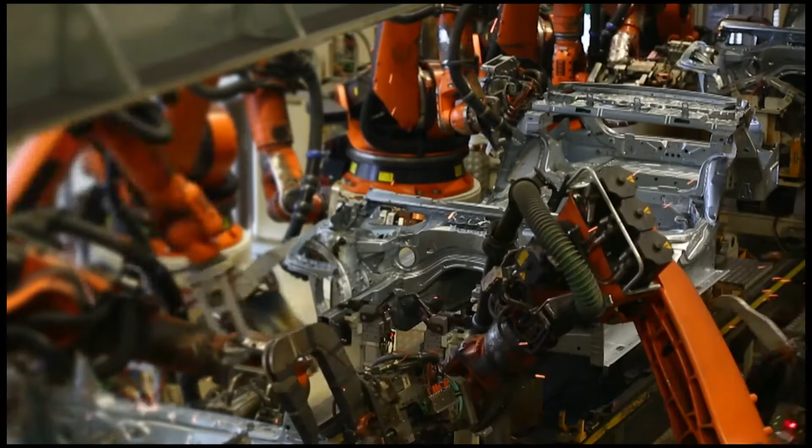The other category is software companies and integrators. Their job is to bring in a piece of equipment and make it do what it needs to do for one of those OEMs, or layer some software on top of an existing hardware system. The third category is the hardware providers themselves - CNC machine tool builders, sensor manufacturers, PLC manufacturers, control manufacturers. Those are the categories: equipment suppliers, end users, and software companies and integrators in the middle.

Okay, that makes perfect sense. So do you have to have an IT person to use MTConnect? You don't have to have a dedicated IT person. There's really no way to get into a digital manufacturing strategy - and that's what you need to fit MTConnect into - without approaching IT. So it might be outsourced IT, a part-time IT person, or someone who's most knowledgeable about IT in your manufacturing enterprise. In some cases, it could be a full-blown manufacturing-dedicated IT department. Across all of those, what's common is that you have to have a plan for what your business needs are and what your IT capabilities and resources are going to match up to. So yes, you have to have someone thinking about IT, but no, you don't necessarily have to have a dedicated IT person just for MTConnect or the rest of your digital strategy.

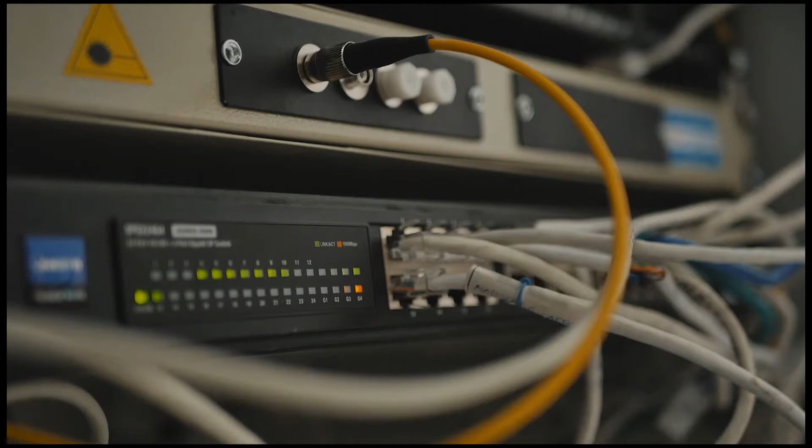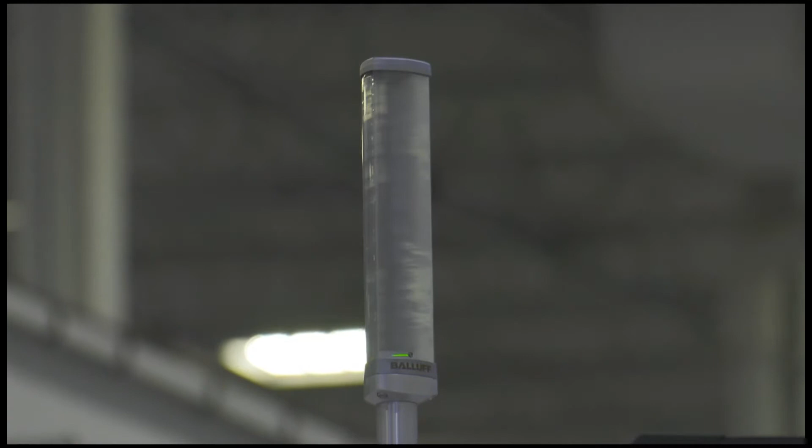Okay, so give us a few examples of some use cases with digital manufacturing that have been either the most fully developed or most fully commercially available. Of course. MTConnect has been around for 12 years now, and in the early days, the primary use case was machine monitoring or factory floor monitoring - basically looking at statuses, uptime, downtime, maybe some downtime classifications, giving you notice when there's an alarm on a machine. That kind of broadly lumps into shop floor monitoring.

That's becoming a more mature use case, and at this point probably the next biggest use case we're looking at is one layer on top of that. So if you're collecting this data, maybe storing it, maybe reporting it out to your various business units, the next layer is trying to do something more sophisticated, something more predictive. That's where the analytics layer starts to come in. And that isn't necessarily guaranteed to be manufacturing analytics - it could be some sort of algorithm from another domain applied to a manufacturing process to predict back to tool failure, component failure, or machine failure, getting away from this maintenance paradigm where we replace fluids or parts based on a prescribed schedule, and instead moving to anticipating when something will need to be replaced or repaired.

Got you. So with that being said, can you explain what Industry 4.0 is? I can explain that Industry 4.0 gets a lot of different definitions from a lot of different places, depending on who you're talking to and what you're asking them about. When someone comes to me and says, hey, I'm trying to do Industry 4.0 in my factory and it seems like MTConnect might be a good fit, the first thing I say is, what are you trying to do? And that's not a snarky comment - it's genuinely, what are you actually trying to do?

It's trying to get to what is your business need for Industry 4.0. In a practical sense, what I really need to know is what data do you need to collect, what purpose does that need to serve, and who are the people that need to consume that data and how in your factory. That's where I take the conversation about what Industry 4.0 is.